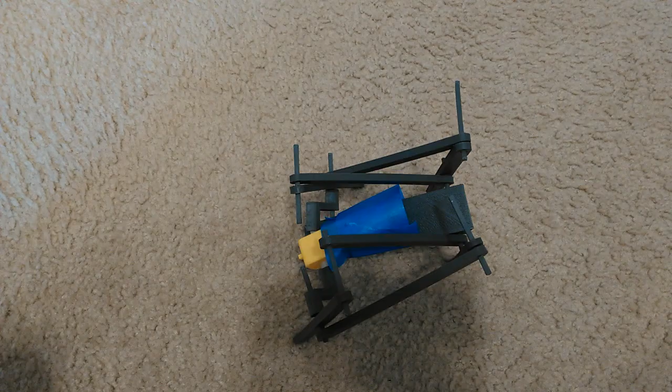Today we see how to make a simple walking robot, this one actually. This is a 3D printed robot, a prototype, so I still need to improve it, but I'll do that with you. As you can see, this is a simple DC robot. It can work with a 6-volt battery, even 3-volt batteries.

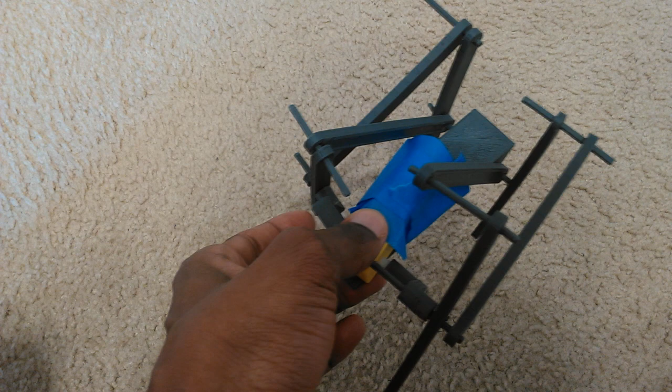Today we focus on the design, the 3D design of the software. We use FreeCAD software just right here. We'll talk about it in a minute, but I want to stay focused with you now on the working robot.

So this robot, you can see the design. You can find it online, you can buy it online also for 10, 15, 20 bucks, pretty cheap, not too much. But I decided to design it myself.

It comes with different parts. Here you've got the arm, you've got the joint here, you've got the chassis just right here, and you've got the long joint just right here. Today we focus on the arm, so we designed the arm, and also we designed the joint just right here. So we focus on that for today.

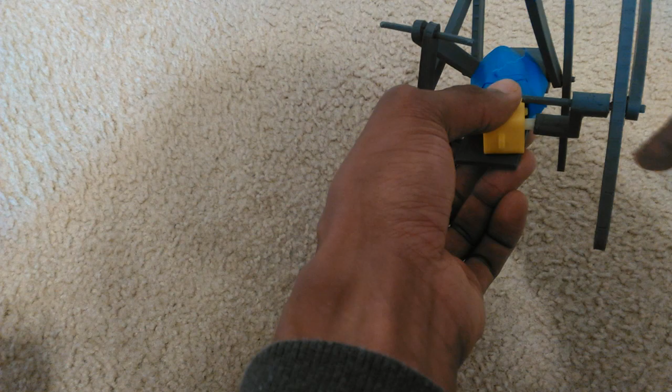So when you first open it, this is the home page that appears just right here. After that, you've got different benches here. You choose part, and after that you click on this, which is creating a new project.

I want now to create the joint that we just saw before, so it's going to be a cylinder. For this, you've got different objects here: you've got a square, you've got a ball, you've got a cone. We just need a cylinder.

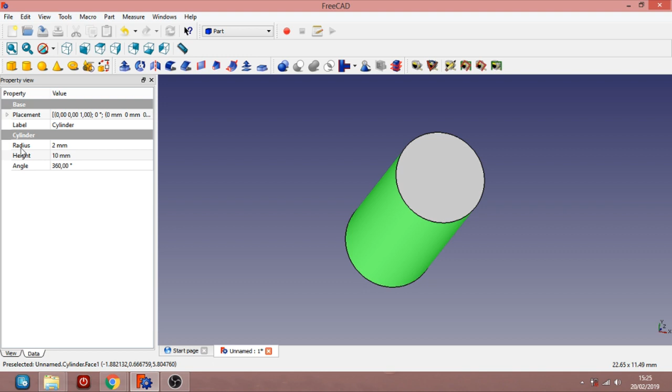So we click on this one, you choose it, you click on the cylinder, and you can see here its radius, its height, and its angle, meaning 360. You can have a half cylinder or that type of thing, I can show you. If you type 180, so you have half a cylinder. So we want a full cylinder with type 360.

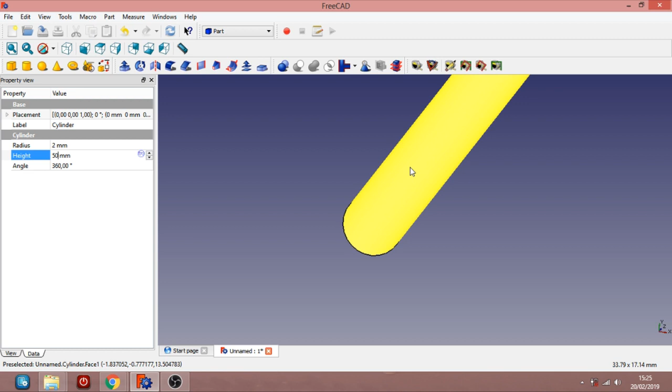To do this, you select it, left click on the mouse, go to file, and click on export. When you want to export, you go to the different extensions, click on STL mesh, and give it a name, whatever you want, and click on record.

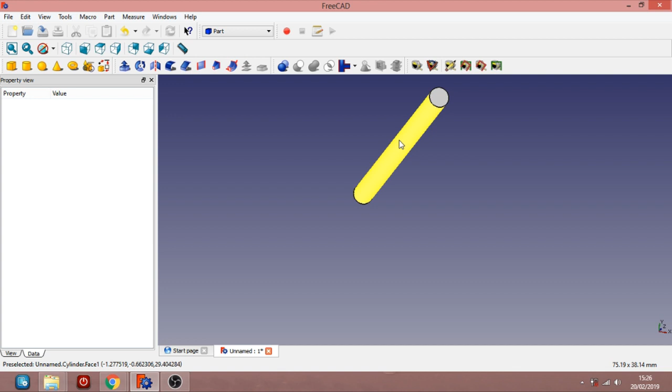So that's the first part for the cylinder. After that, you can close the file - no, I don't want to, because I already did it. Then you could create a new project, so you can click on this one too.

After that, you change the workbench. You go to Part Design, just right here. So what we want to do is the arm.

What's nice with this is we've got a tool here to make an arm. You go here to create a new sketch, and we do it on XZ - it's just the reference you want to make it on, since you can do it on XY, XZ, or YZ. So we go on XZ, just right here. There we go, and after that we use this tool.

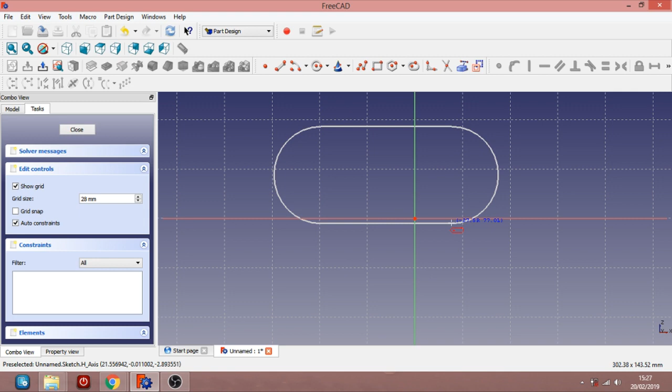As you can see, this is our famous arm that we had before. So there we go, I want a size of 70 for the length. I click on this, and after that you go here and you choose this to fix a size for the horizontal lines. So we click on this, and we type 70.

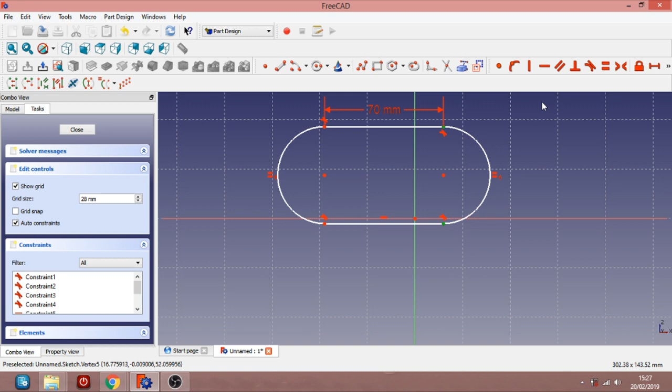We want a distance between the two lines to be 10 millimeters. So click on this, between this one and this one, and we click on this, and we want it to be at 10. It should be like this.

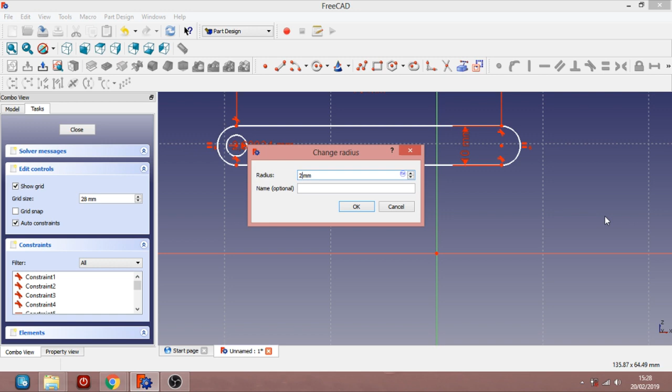Now we also want to add 2 holes for the joint to go through it. So we go to the workbench here, and we click on this circle tool. We draw a circle. We want the circle to be here, so we click on the circle just right here, and also the point just right here, and you click on that and you change its place. We want the circle to be 2 millimeters, so we click on it like this. It becomes green, and you click on this schematic just right here to fix the radius, and you click on it, and it works like this.

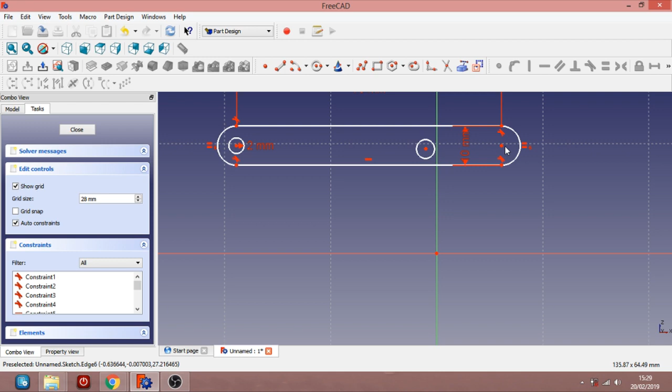After that, we do the same thing. We want to create another circle here, so grab it here, we click on it here, and we create one just right here by holding down the left click on the mouse. It should be like this. We do the same thing again to place the circle on this point just right here, and it should be like this. Now you can click on it again, and set the circle to be 2 millimeters. There we go.

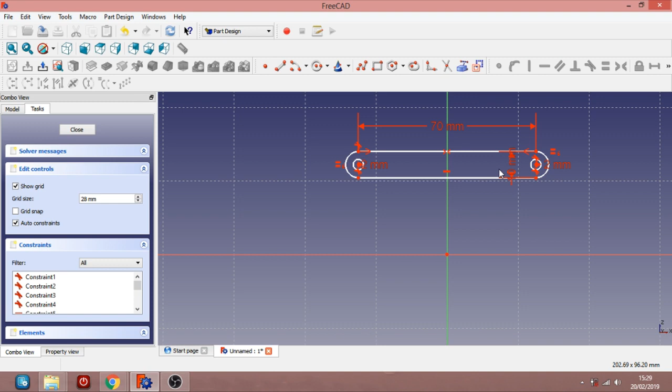Now I want to put the arm at the origin just right here. So what we can do is click here, on this point here. Let me zoom in for you. We also click on this middle, so this and this are going to be at equal distance from this line. By clicking on this, you do it like this. So we move it a little bit down, to have the horizontal line in the middle of those two.

We do the same for horizontal part 2. Let me zoom in for you. We click on this point, the middle here, and now we're okay.

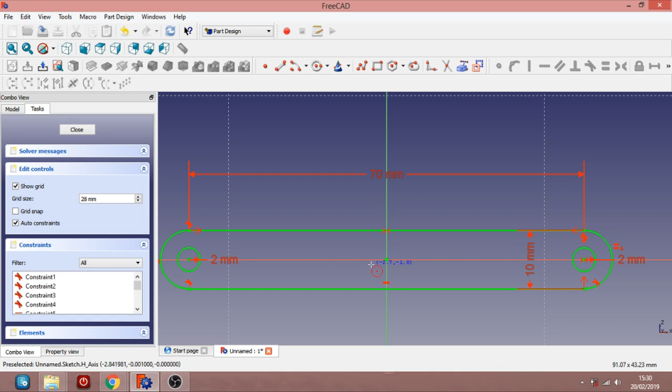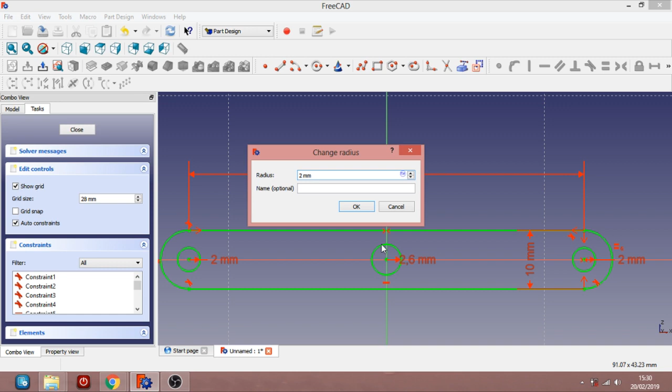I also want a last circle in the middle for the joint to be able to go through it too. For this one, we choose this tool, and we draw the circle. Like before, we want it to be in the middle, so we click here, go to the middle, and we want the radius to be 2 millimeters. So we go back to fix the radius of the circle, put it on 2 millimeters, and click OK. Now we can close the sketch.

We finish the drawing part. Now we want to draw a 3D model of this. To do this, we do an extrusion, and we usually use this tool just right here. We click on this, and a window appears where you put the length, or otherwise the thickness of it. I choose it to be 4 millimeters, but you can put 3 if you want to. That works like this, so we can see what it looks like now.

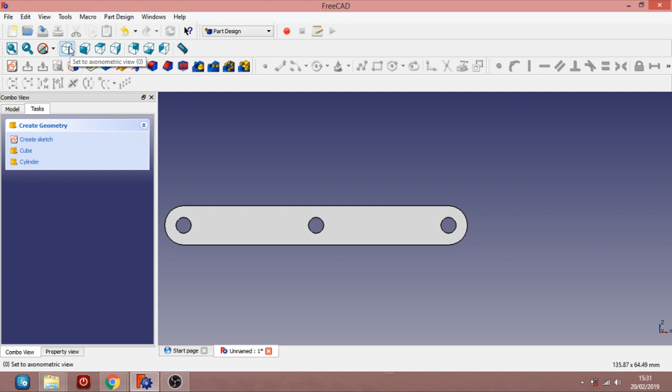So we have the different views here: the front view, the top view, the side view. Let's have a 3D view so we see what it looks like. It's pretty nice now. In less than 10 minutes we did that.

Now we select our object just right here, or we can go to model and click on this last thing, click on pad, go to file, export, and we choose, as we remember for the first one, STL mesh if we want it to be 3D printed, and give it a name. I click on cancel, but you should click on save.

This is the first part of this project for the 3D design. Next time I'll draw the chassis and the part between, where we link the motor to the arms, and we'll also have the assembling video, and the different parts for the electronics and wiring. So thank you for tuning in, and see you soon.